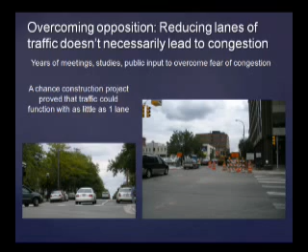After we did our improvements — just to remind people — our goal was to use up as much of that public right-of-way for human-based activities as possible, create opportunities to support the uses along the length, and again, encourage the private sector. Some of it was done with these bulb-outs and sidewalk expansions. Some of it was done simply by adding on-street parking. We created bike lanes that ran the length of these streets, the goal of which was to connect to what we already had in place on Packard.

What we've seen as a result of this, and I think you've seen it too, is many more people walking on 5th and Division. Many more. It used to be fairly common to not see many people. Many more people are walking north-south. Not saying it's done perfectly, but it's definitely improved. We've also seen much more foot traffic on Liberty and Washington, those east-west streets. Some of it is, again, the crossings feel more comfortable for people to make that journey between the east and west parts of town.

We've also seen significant reinvestment along these streets. We noted for our presentation to the DDA how many businesses had actually taken shape in the intervening couple of years. We used as an illustration, for those who don't know our downtown, Huron Street, which is also a very car-centric street. It was also a street the DDA was examining for improvements. We did not go forward with those improvements, but during the same time period, we also didn't see a whole lot of ground floor activity taking place.

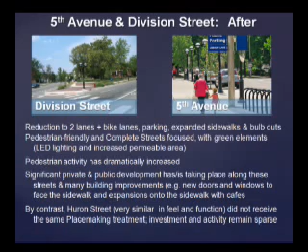We've subsequently seen the 413 building and the hotel come in on Huron, but at the same time that 5th and Division were happening, Huron was not seeing a lot of private attention.

So some of the elements of this were trying to find ways to make the pedestrian experience feel more comfortable. Some of that is narrowing in at the intersections, and some of it is making the streetscape itself feel more comfortable and attractive.

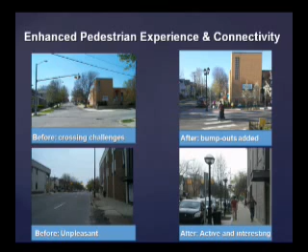What you're now seeing on that lamppost, for instance, are banner poles, so we're encouraging nonprofits to put information and signage up on those banners. Trees and large, long lineal planters encourage the trees to get healthy and strong.

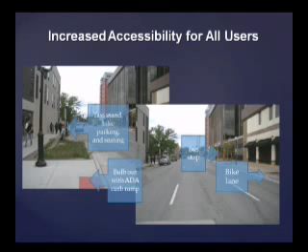We also thought in a multimodal way. Something we now take for granted was a pretty big idea when we did this 10 years ago - the taxi stand, bikes, seating, making sure everything connected with the buses running through the area. This was an important part of our planning from the beginning, a multimodal use of these streets.

We saw quite a lot of private reinvestment taking shape, as I mentioned. Some of what we demonstrated for them in our presentation was examples of redevelopment opportunities - businesses, buildings, submitting to the city permits, actually documenting where it took place. You can sort of see Huron Street at that point versus Division and Fifth.

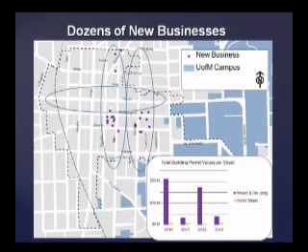The mix of businesses was also important because downtown's diversity is among our strengths. So it was not just one particular kind of reinvestment taking shape - everything from residential and groceries to restaurants and services.

The crossings happening east-west were also important to note. Those bulb outs, though a very simple design element, serve a purpose, which is to encourage people to make the journey. Years ago, when the link was operating, one of its initial inceptions was to get people between Main and State - that was how few people actually made the journey.

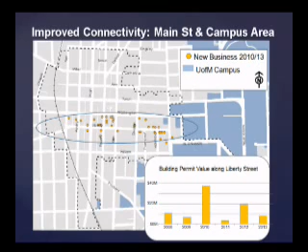As an illustration of how many more pedestrians we're seeing, we also noted the new businesses going in along Liberty Street. Some of this is because the foot traffic is strengthened - it's encouraging Mani Osteria, Isolita, the Hanover building, and other buildings along the stretches that may not have had as robust usage before the improvements went in. This is an illustration of the kinds of businesses that took shape.

So this is just a very short snapshot. We don't often take a look backwards, but I thought it'd be important to acknowledge the award that IDA gave to the DDA, and their congratulations - this was definitely seen as an important example of really good planning and really good implementation. We see it ourselves every day on those sidewalks.

Thank you, Susan. I think we all appreciate the amount of work that went into that project, and many of us feel very proud and very happy about how it turned out. It's nice to be acknowledged.

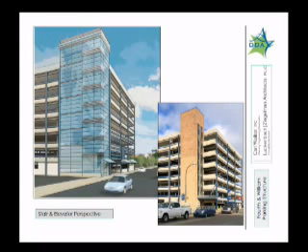This is an image we shared with you at the board meeting when we made our approvals. You see over the entranceway an enhancement calling out the entrance, just to be sure people know that we're planning this as part of that stair elevator project. The introduction of the material of glass is something we learned through this process is one of the reasons the garage has somewhat oppressive feelings about it—it's one of the few buildings, if not the only building in downtown, without windows.

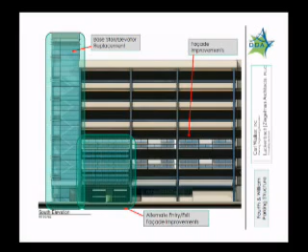At the last presentation, they also had an alternate they presented for that element over the entrance—illuminated panels that would include signage as a possibility. I think it may be at the end of this. That point is important because calling it out means no one takes it for granted with all the distractions downtown. You need to know exactly where the entrance is. So they've refined this, absolutely.

This is the awning that's under exploration. Not only for the Greyhound, but if we did a retail build out—or even if we didn't do either of those—one of the ways to help that building be more of a positive presence on the sidewalk is something I happen to adore in downtowns. I hug the buildings, as many of us do when it's raining, incredibly hot, or snowing, buildings that have awnings.

So it's an exploration on how the garage could add that element, and even as doing it, improve the appearance. This is not your standard canvas awning—instead, it's a glass element with lights built into the design, so it gives a sense of lightness. But the idea behind the awning is to be a pedestrian amenity. How the costs sort themselves out, we're still exploring, but this at this point is where we are with our exploration.

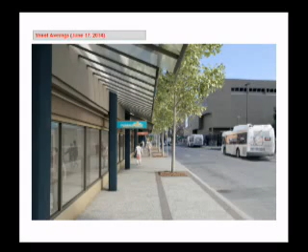I think that's the new and improved version. You see the sense of translucence, and the idea is to design it in a way that at night this would appear as if it's glowing—the same way Library Lane has that beautiful lightness to it. This is where Carl is trying to draw the imagery for the garage.

The exploration is to understand what are the ways in which the garage can be more of an enhancement to this section of town. At some point, the committee will come back with a recommendation about project elements we would like the board to approve supporting. Or it may also be viewed as a master plan that can be phased in over time.

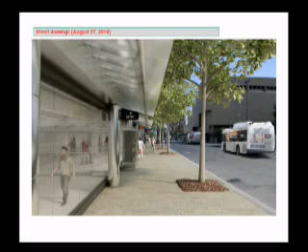This is just how the awning is suspended.

More about the build out on the first floor. You start to see the exploration of William Street. In this illustration, Republic Parking has vacated its offices, we've taken it over and taken over a couple parking spaces. You're starting to see the exploration about how ground floor uses could integrate in with what is now facade improvements and awning and the stair elevator improvement.

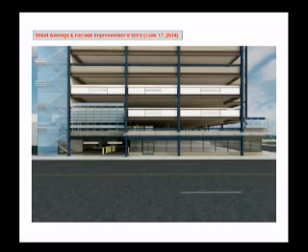We also, as part of our exploration, don't get frightened anyone who was part of the council debate, we explored what if we had signage up on the garage that would be of interest and use to the folks at Blake Transit Center right across the street. We immediately put aside this electronic billboard, saying this probably would not be something the community would embrace, but it is interesting how quickly you stop looking at the largeness of the garage and instead your eye is drawn right to, you know, CNN playing on the big screen.

What is less visible and something we're looking to explore a little further is right below the big sign, there are these LED signage boards that are an opportunity for us to work in partnership with AATA with information about the transit. It doesn't have to be done at this point, but it could be information saying the number 9 is delayed by construction, the number 12 showing up any time now, just the date and time for those of us that use the bus.

I gotta say, I'm riding it on the weekend and I know it comes at 6:18, but I have no watch on me. What time is it? I like showing up anytime now. We promise, don't leave.

Stay right there. So it's an exploration around messaging that, again, helps to distract the eye from the bulk of the building. Again, we may or may not be pursuing that.

This is, as John said, the latest iteration. You saw the earlier facade improvement. It's been refined. It still has the glowing nature, still meant to be lighter than what's there now. You can barely read it, but it says the 4th and William parking structure. Obviously that would be made more bold, but it is an illuminated sign with the sign element having the electronics behind it.

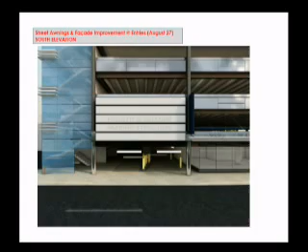Should I just go back one real fast? Just a second. So I know everyone's anti-giant digital billboard, and I would tend to agree with that general principle, but I don't want people to get afraid of things that would be messaging or signage that's that big if it's not digital. There are certainly ways to have something that could be considered an advertisement, whether it's for a local organization or a project that the city's doing or that we're doing, that would be technically an advertisement, but would at the same time be a significant improvement aesthetically over the old parking structure with the barren shells, right?

You know, the perfect example is some of our own work. The AATA bus shelters along 4th Avenue there, technically for all intents and purposes, those are ads for the city and other organizations and the AATA, but it's really a giant photograph of Argo Dam with people canoeing on it, right? So it looks better than the blank wall of the federal building, even though it is technically an advertisement, it's technically a billboard. So I just want to keep open minds to not just saying no to everything that could be considered an advertisement, as long as we have significant control over what that message is and what it looks like. It's still our piece of wall, and we get to say what goes and what doesn't go.

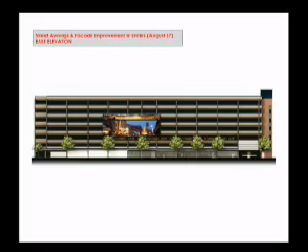I think a significant aspect too is that this was presented in the context of a design element for this structure, and in my mind we can design all kinds of things, but I think what's very important is the management of it. It goes a little bit with what we're talking about with plazas and parks, eyes on, and who's going to manage it, which I think is significant and may take us in a new direction, which may be great, but we have to put the infrastructure in to do that, and figure out what that means.

We didn't actually talk about what would go on it. That wasn't even part of the discussion when we were looking at it, and to be honest, that's really the important thing. So for instance, it may be that if we wanted to do such a thing, this may not be the structure or the place to do it, you know what I mean?

Well, I've actually put a lot of thought into what we would put on that structure, because I'm constantly looking for places to put messaging.

And I've even had discussions, at least with Rishi and other folks -- originally we were talking about parking downtown, what would be a good service we could provide to some of these people already doing events downtown. One of those things is, if we had more inventory of places to put messaging, that would be a good place for us to very inexpensively contribute to people already doing great things downtown, and we could just lend support to, whatever, Sonic Lunch or whatever.

So I think honestly the AATA bus shelters are the perfect example. If you walk down 4th, those have been there for a year and a half now, and that's a good example of technically an ad, but it doesn't look like one. It's an improvement over what was there, they're supporting local events and organizations, and also a pretty thing to look at.

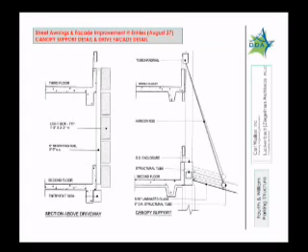I think originally, prior to the stairwell renovations going forward, we were just thinking we could cover that brick wall, that big empty brick wall, with something as a simple quick fix, but that's obviously moved now. I was thinking maybe not us—can it be more work on the part of our engineers to figure things out?

Okay, now we're going to do the ground floor. So looking at the garage, this is actually a photo taken while we were adding a floor to the garage. Today we'd be staring at the fairy garden, and we're sorry to say, but if the project went forward, we might be giving the fairies a new home address, because we might be using that corner. But that's what it looks like today.

To give you a sense of use, right under the speed ramp we punched a hole—that's where Greyhound is operating. Over here, Republic Parking has some offices, a couple parking spaces, and that part where Greyhound is, that's a speed ramp. Beyond that is parking, and it terminates with a series of bike hoops, bike parking.

As we looked at this space, we started exploring what we could add downstairs as retail space. The idea started with the Connecting William Street work the DDA did two years ago. That project involved the DDA working with the community to assemble redevelopment strategies for council approval, utilizing the Kline lot (South Ashley and William), the Palio lot (Main and William), this ground floor of the parking garage, the Old Y lot (5th and William), and the top of the Library Lane garage.

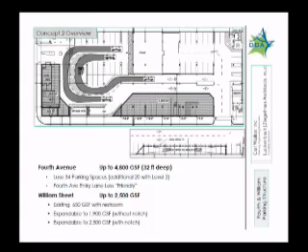That gives you a sense of the space we'd be looking at. In this location, the engineers are starting to develop a concept of how the space could be broken up. It's important to note that on William and on 4th, there are differences in the height of the sidewalk and the height of the garage.

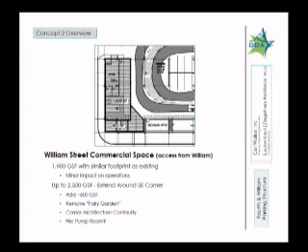Some of the early exploration had to focus on how ADA compliant entrances could enter off the sidewalk into the garage. And then that also helps us determine how the space could be broken up.

We met with a commercial broker. Some of what we learned, we shared with the engineering team - that there is a lot of demand for retail space, that this space, particularly being on 4th Avenue, is becoming a very interesting retail corridor. It might help complement some of the other new and interesting entrepreneurial retail happening on 4th Avenue. The street frontage is really important, so that exercise about pushing the drive lanes into the interior of the garage and maximizing the amount of street frontage available on 4th Avenue - we were heading in the right direction.

We looked at that Fairy Garden, and the recommendation was to clip the corner at 4th and William so that you have sort of a diagonal point at the garage where you can actually get around. Potbelly's at State Street or the Verizon store here at 4th and Washington are two examples where you can kind of cut the corner. And you can sort of see some of the other things that were being discussed.

Some of the other things we talked about with them was a recommendation from the broker to create flex space - instead of building interior walls, create an open space. An example for us, at least in my mind, is the Kerrytown shops. It's one larger space, and yet each entrepreneur, each retailer has their own reserved space, and at night they chain it off. So Monahan's is separated from Sparrow, which is separated from Cosmo Deli, but during the day it operates as a single larger space.

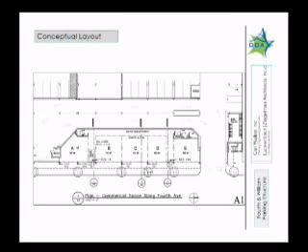It also means that as tenants come in, they may not want 800 feet, they may want 900 feet. So rather than drawing the line ahead of time, this allows the marketplace to help dictate. There's William Street broken out with two entrances and an ADA compliant entrance.

And again, there's that exploration. One of the ideas behind that as well was that it gives us flexibility moving forward for the use of the space if the incubator concept were not to progress like we wanted. It would not be a huge cost to break down walls, redesign a space, or adapt for future use. That's obviously not what we're trying to do, but we want to look at all aspects of a project like this to make sure we have ways to pivot and hedge our bets, things like that.

Another thing being explored - this is a 1950s garage. You've seen Library Lane, we now build with lovely ceiling heights. Well, in the 1950s the garages were long and low - those big, beautiful Cadillacs with those fins. These low ceiling heights are sort of a remnant of those older days. But how do people fit in that space?

So you see here an exploration of how much ceiling height someone might have in that office, trying to understand how comfortable and how attractive that could be. The general sense is it could work.

If you've been to the Menlo offices in the Tally Hall building, it's a parking garage, but actually it's kind of cool, it's got that authentic urban feel. There would be no attempt to hide this. This is going to be in a garage.

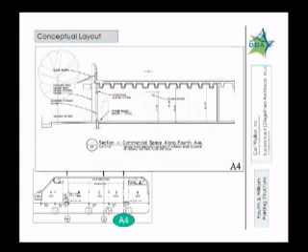What would be done if it were pursued - you can see the early illustration of what would be a waterproofing element, because again, this is a parking garage, steel and concrete, and those things drip water. So trying to illustrate how we could create a very comfortable, human-centered environment, even as we allow rough concrete floors and columns. It's a 1950s garage - there'd be no attempt to hide it.

And there's more examination. I forgot what that one is - does anybody remember? It's the south entrance on 4th. With the ramp - the barrier-free access ramp. There we go. You saw this image earlier.

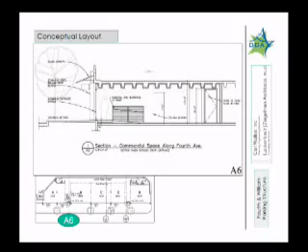This is that translucent awning, and what you're seeing to the left is what that retail space might feel like as you walk down a sidewalk. We met with the building official.

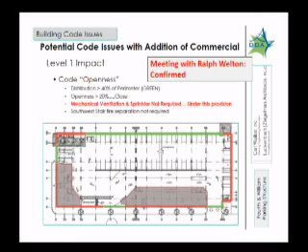The openness of garages is something many of us don't think about, but closing off an office brings up the question of how much of the garage needs to remain open rather than triggering the need for sprinklers. The project costs, if this was pursued, are greater than a simple office because we need to address building code issues, since now there's a mix of uses that a parking garage itself doesn't require.

So what they've done is gone through in a detailed way what that might look like - more about the code issues we should be anticipating. The project budget, at least initially, was on the high side for this space. They've brought it back down.

Rishi made this point earlier - we don't need pretty. At $330 a square foot, which includes soft costs, we'd end up with pretty. If we had a rough space, including a 25% soft cost, we're closer to $265 a square foot, because that's engendering all the other code-required changes to the rest of the garage.

You can see with a big price tag like that, we're not rushing into doing any kind of immediate approvals. One of the last steps is they've recommended that, with Art Lowe's help and Republic Parking's help, we run a couple test drives of what it might look like to shift that drive lane interior to the building.

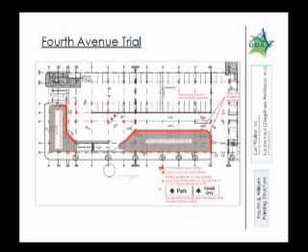With Joe's help and Art's help, looking to actually try it - as much as I've talked about with Fifth and Division - can people actually make it? That might cause us to reduce the size of the garage if we need bigger drive lanes, for instance. So actually trying in a piloted way might refine that 4,800 gross square feet to something smaller.

We asked for a schedule, although we're not jumping right into it, just to give us a sense of how this might look - those 3 phases of the stairwell I mentioned earlier. We're going to continue with refinement of our design over the fall months. If this was pursued, you'll see construction documents and all of that. Obviously, we would come to the DDA before any of that would be brought to any kind of formal action.

But meanwhile, the stair and elevator work continues - they're underway with some construction drawings on the stair elevator. If this schedule holds true, we could get a lot of this work done beginning with the next construction season, really beginning with the new year, and continuing over the second construction season. So that's their exploration of what a construction schedule might look like.

And the budget - those are the numbers you saw earlier. The stair elevator, rough estimates, $3 million. The entrance improvements, $620,000. If the awning was pursued, that $1,175,000 has been reduced to $900,000 - they did some costing and discovered they had added a couple elements.

And then here's some of their exploration of some of the other elements, and again you see the refined numbers on your memo in the board packet.

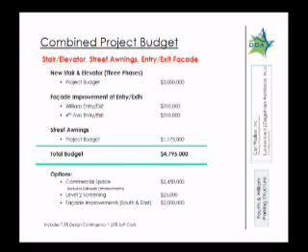And we, of course, made sure that they are covering things like contingencies and soft costs and so forth. So this is really, I think, where we are at this point.

The facade, $2 million that you saw in your packet, just to walk you through this, this is that exploration around glass. What you see here on the lower 3 levels of the garage is the integration of glass panels. These panels would have a solar collector on them, and the idea being that the energy generated from these glass panels could help to fuel the energy used inside the garage. An example is the electronics for our parking equipment.

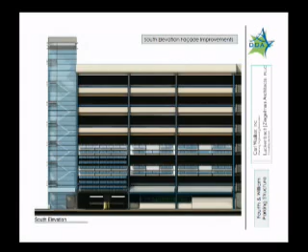Here you sort of see it again, where those glass panels find themselves on the 4th Avenue side with an awning. Here's what is at least an early exploration of glass panels, how to dress up the garage. I think the total cost for this was about $2 million, which is what drove us to explore other ideas like the billboard and other things.

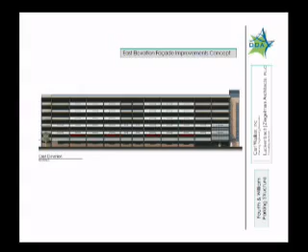And that may be the last of our slides. I think that's the last of our slides. John, Rishi, John, and Roger, anything else to add to the presentation?

Yeah, I guess I'd like to add something. This is a little bit in the same vein as something Ray was alluding to earlier, I think, with Liberty Plaza, in that you can go just so far thinking about the design of things, but you have to return to how it's going to be managed and what you're trying to accomplish. So I think it's going to be very important for this, when it goes back to committee, that operations or partnerships look at what we're trying to accomplish with the concept, incubator retail - what is a measure of success, what are the expectations? Because if we were to move forward, it's expensive space.

So we have to feel comfortable and confident that this is going to fit into our mission of promoting private reinvestment downtown. We're going to help create new retail businesses that will go from having a 300 square foot space to a 3,000 square foot space. It's an area that's new for all of us. So the more we can understand what our expectations might be, and what it would take to manage to get us there, would probably help people feel comfortable when the time comes to make a decision about it.

Because, in my opinion, it doesn't have to be pretty. It almost doesn't want to be pretty for incubator space. It's mainly providing that function rather than that design, if you know what I mean - just a space where somebody can try to get a foothold.